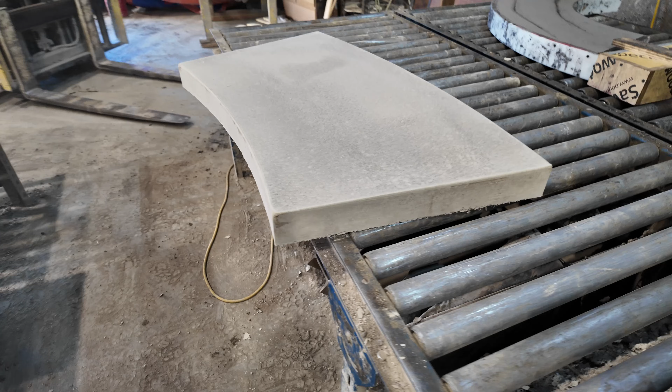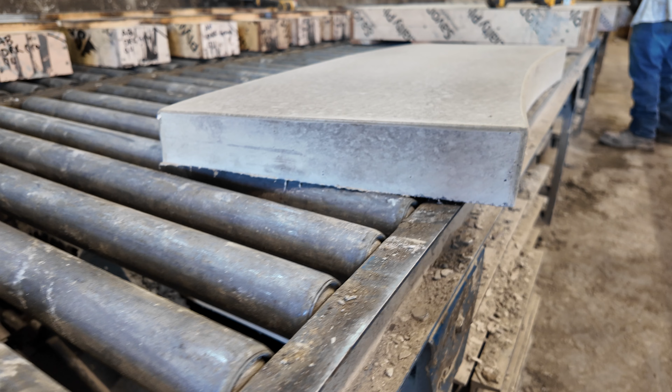I've got two molds to build today. One of them here, it's a flat one. It does have a radius to it, so there's a little bit of work. The second one here, it has a radius and it has a slope. You can see it's higher on one side than it is on the other. They want some water to drain off that.

So unfortunately, we ran out of plastic at the shop, so I'm going to have to go old school today, and that's going to be kerfing it out. If you don't know what a kerf is, well, you could ask my son, but he'd probably say, I don't care. Or you could ask the dictionary. It'd say it's a slit, a notch, or a channel made by a saw or a cutting torch. But don't worry, we're not going to be using a cutting torch on this today.

Let's get to it. We have an outdoor, it's like a fire pit area. We got a fire pit here. We have a radiused seating and a wall cap behind that. That's radiused as well. This is kind of a little bit of a head scratcher because it's almost like we're making an arch. We're taking a part of a circle, so we got to do some math and figure this thing out.

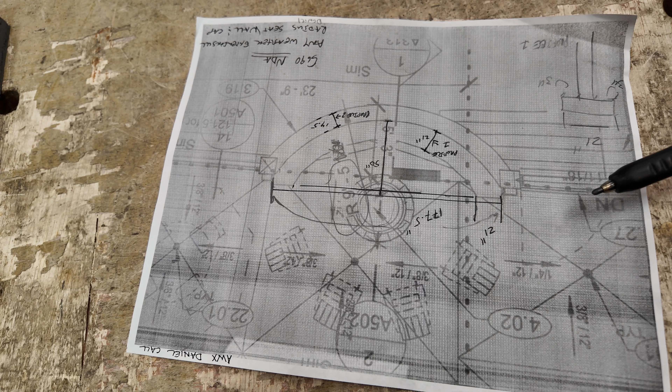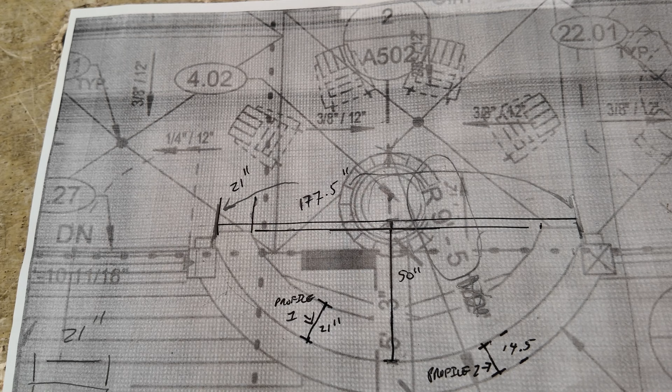And on top of this being a radius piece, this top one, we're also going to have to slope that down a 1/2 inch slope. So a radius and a slope. The bottom line is we have, I'll put it this way, it's like upside down right here. 177.5 inches as far as the diameter goes. And the rise that we have is 50 inches to the outside diameter of the seat. And this is going to be a natural gray.

So we have two parts that we're dealing with here. We have the, let's call it the top part. And the top part we're going to do in 7 pieces. And if we do that in 7 pieces, we end up with 35 inches long by 14.5 inches wide by 2 3/4, sloping down to 2 1/4.

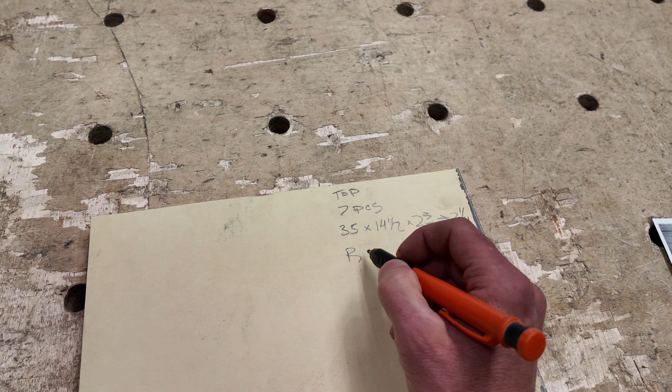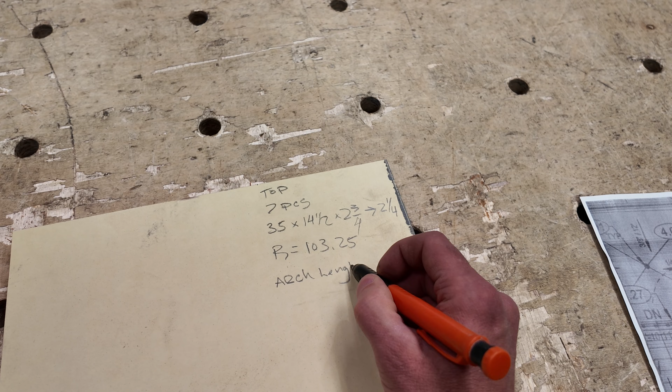And we have a radius on that one of 103.25, and total arch length on that one is 244.92. So that's how we're going to build that one. We're going to use that radius and we're going to extrapolate from there, but that's what we're going to do.

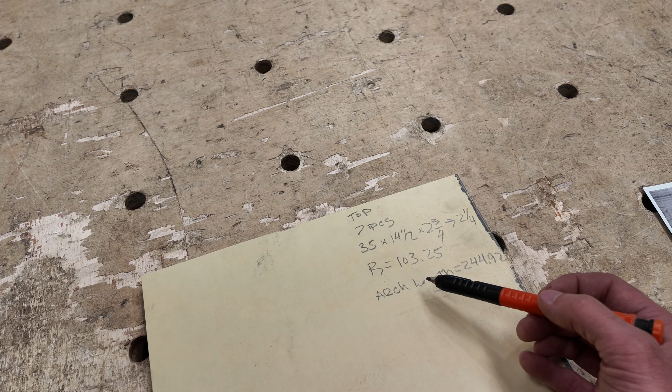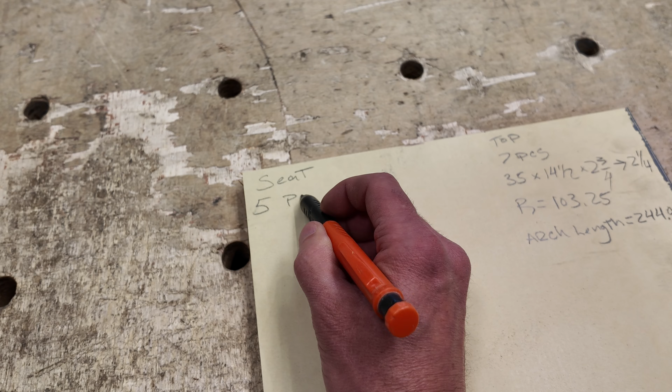As far as the seat goes, the seat we're going to do in 5 pieces. That way we don't have a seam. One thing we didn't want to do was have a seam right in the center on both of these. So we want a whole piece right here split in half, and then the remainder this way and the remainder that way. Aesthetically, that's the way they came up with that concept. So we do want odd pieces on this. We got 5 on this one, 7 on the other one.

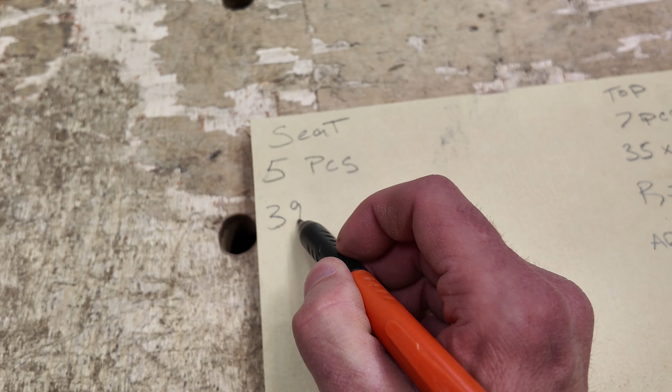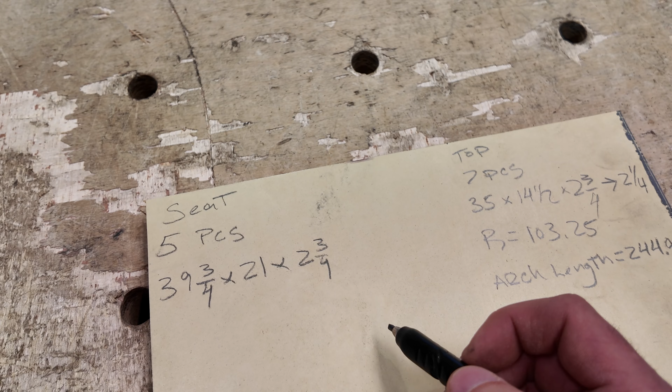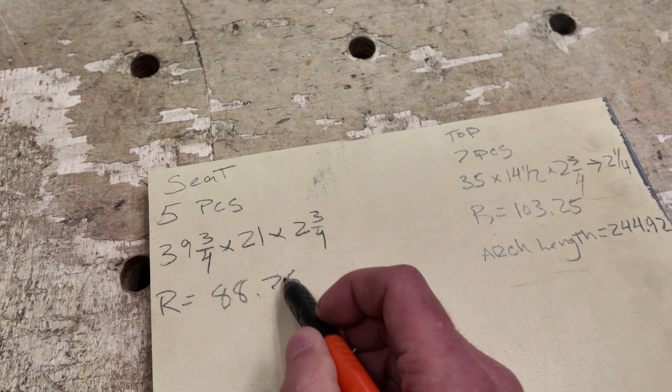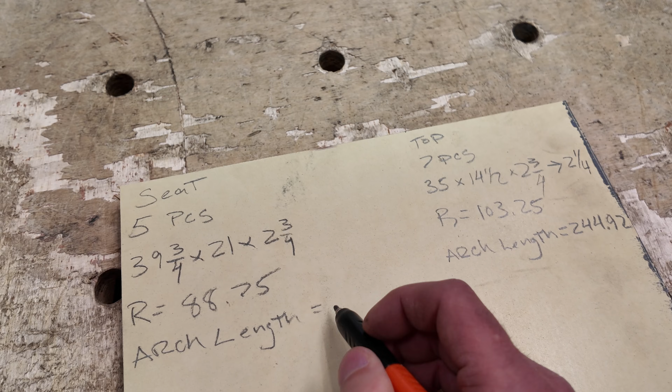So we are going to be at 39 3/4 length by 21 wide by 2 3/4. That obviously can be flat because that's where you're sitting. Our radius is 88.75, or 3/4, and our arch length is going to be 198.42, otherwise known as 5/8. So that's what we're going to build today. A little bit of a thinker.

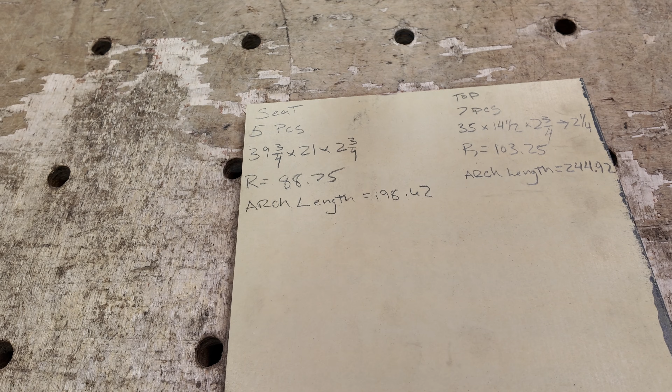We're only building one mold for these, one mold each, and we'll pour the top piece 7 times, and we'll pour the seat piece 5 times. So just one piece. So that's what we got. And this is all going to be natural gray. I don't know if I said that.

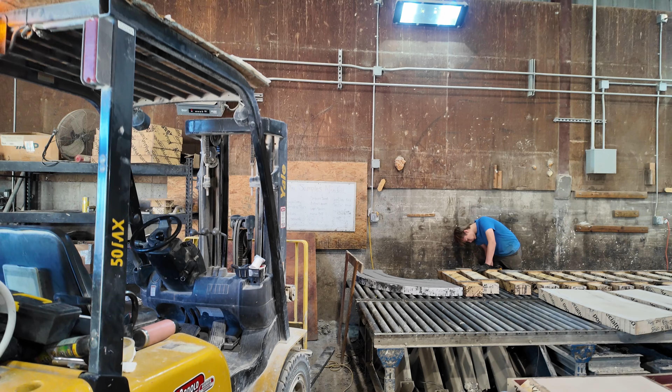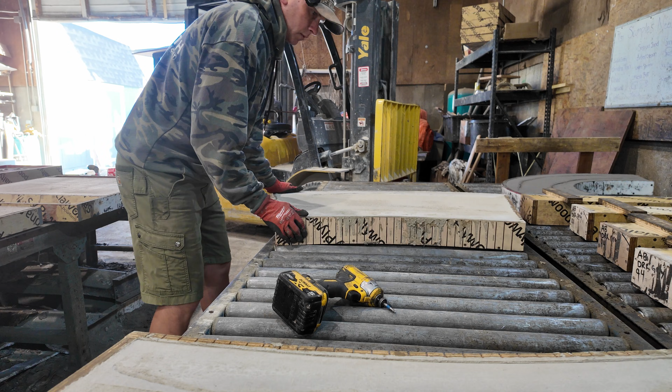Okay, it's the morning. We're going to strip out those radius pieces. We got the big 21-incher. And then we got the 14.5-incher. Might be too hard.

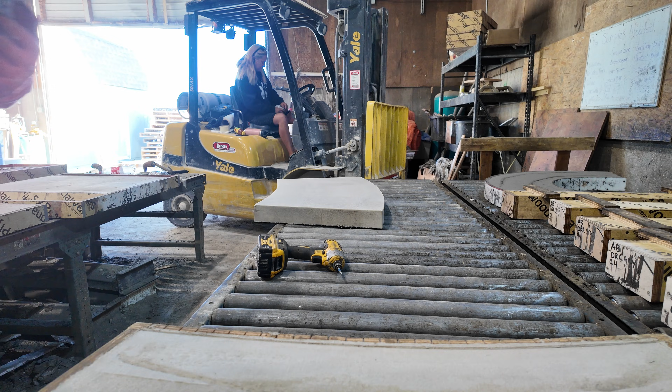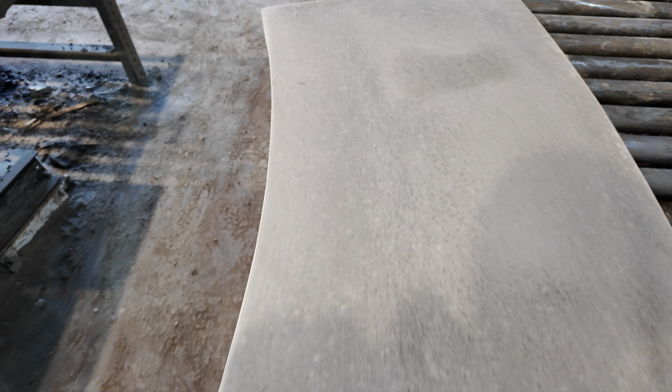Whew. Got it. That came out real nice. You can see it's a little splotchy and stuff right now. Put that out in the sun and it looks perfect. It just needs some time to cure out a little bit. Color pieces look even worse, but give them some sun, a little bit of time, and oh, they look great. So let's get this little guy.

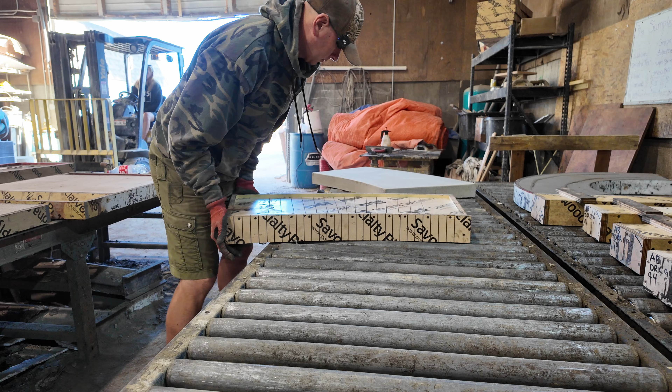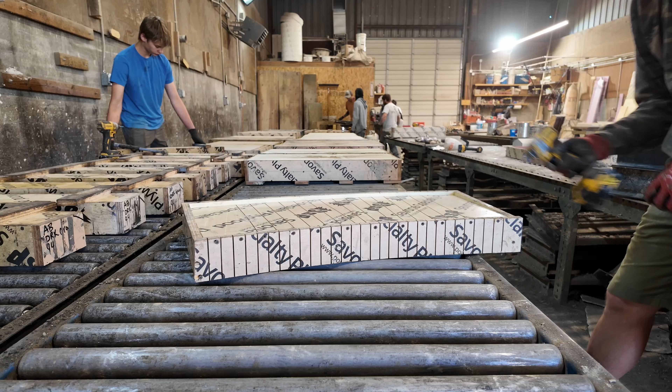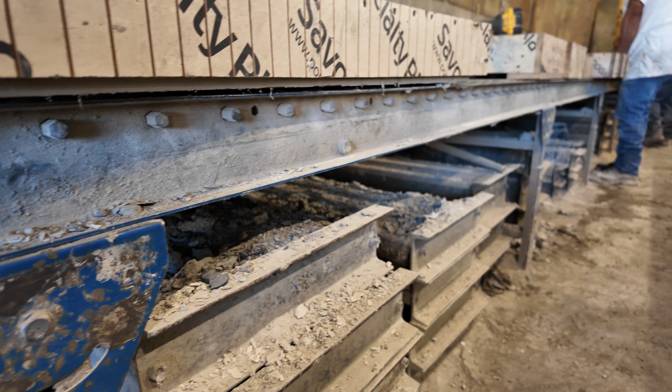Feels good. It's coming up. You can see that a little bit there, a little bit on the other side. Just keep working it. Kind of tough on these odd shaped ones. They tend to catch in the corners. One side too much, it binds on the other side. We're talking like an eighth of an inch is too much sometimes. Oh, that feels good. Feels good. She's coming.

You can see that slope comes from 2 3/4 down to 2 1/4 there. Came out beautiful.